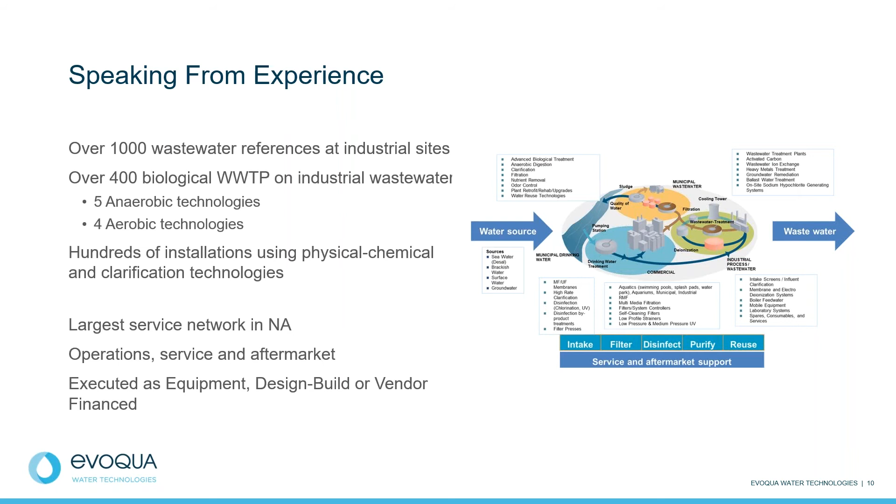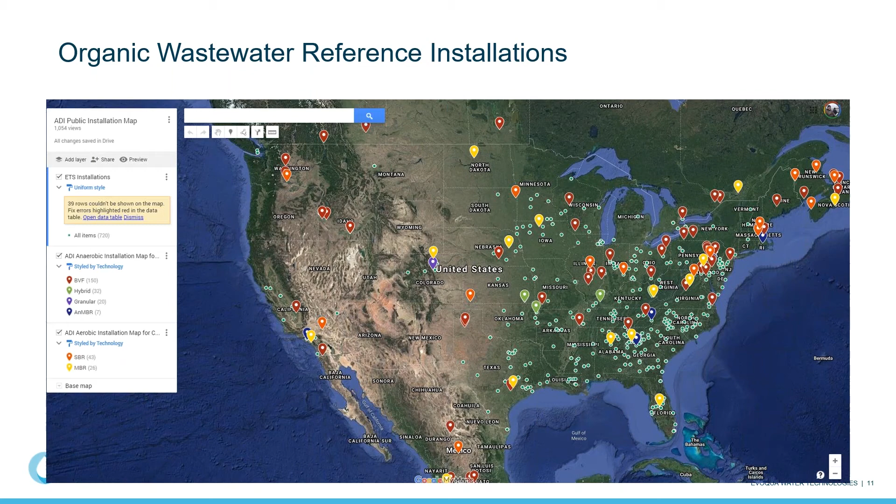Thank you. This is a quick peek at the reference installation map. As you can see, there's typically an Evoqua installation somewhere near you, should you like to go visit one. And with that said, I will hand it over to Jose to do case studies.

Thank you, Barry. Can you hear me okay? Hey, Barry.

So the question I'd like to ask you all, if you're involved in the food and beverage market, is what's in your wastewater? Kind of like that "what's in your wallet" question. What is in your wastewater? So when you're talking about the food and beverage industry, each plant will be unique, of course, but there are some common elements to all food and beverage processing plants.

So your wastewater will look a lot like your final product. So if you're making soup and putting that soup in a can, your wastewater will look similar to what that soup is, plus a lot of water. So wasted product, lost product, and then cleanings from your CIP lines and things like that.

If you look at it in a different way, your wastewater will look a lot like what the kitchen sink drain would look like if you were to make this product in your kitchen sink, or in your garage if you're brewing, if you're making beer.

So I thought I would come up with 4 examples that I wanted to discuss, look at the common elements and also at the differences. So I've picked some of my favorite things. So beer, French fries, candy bar, and yogurt. If I can get into the first one, Barry, please.

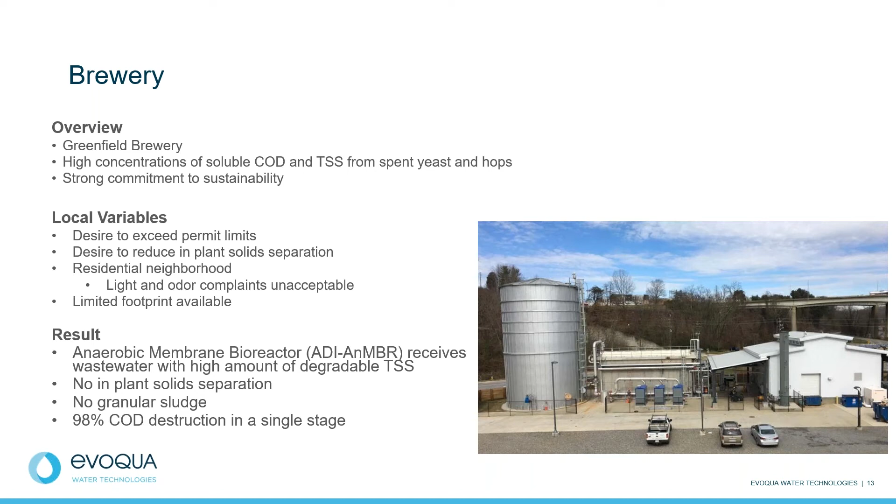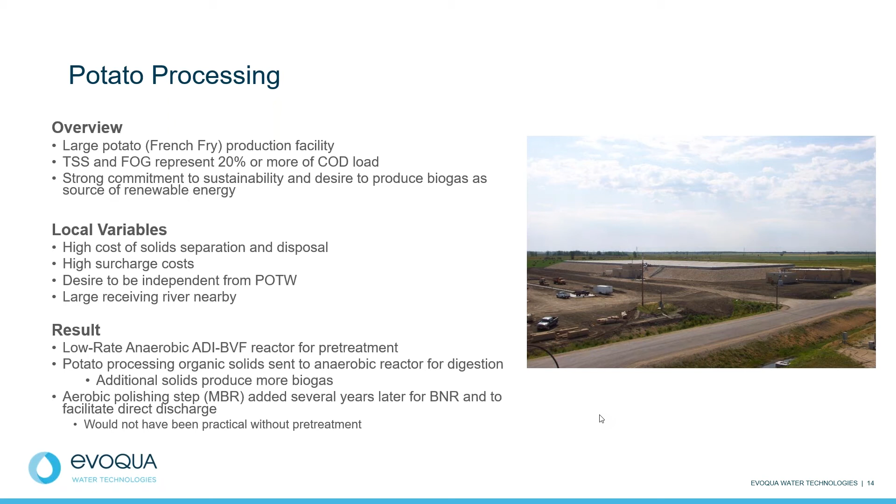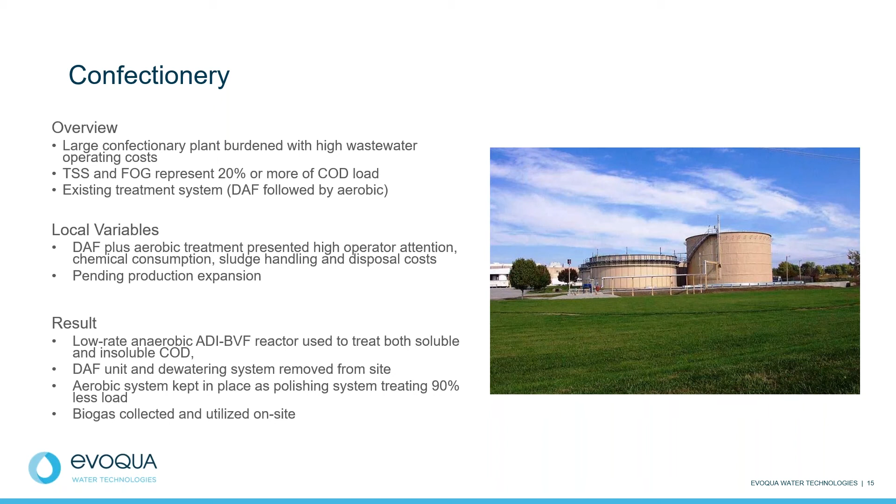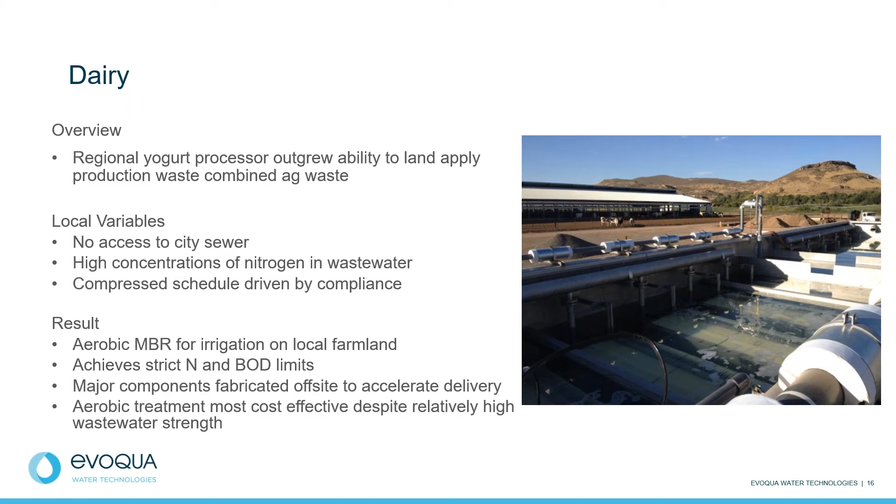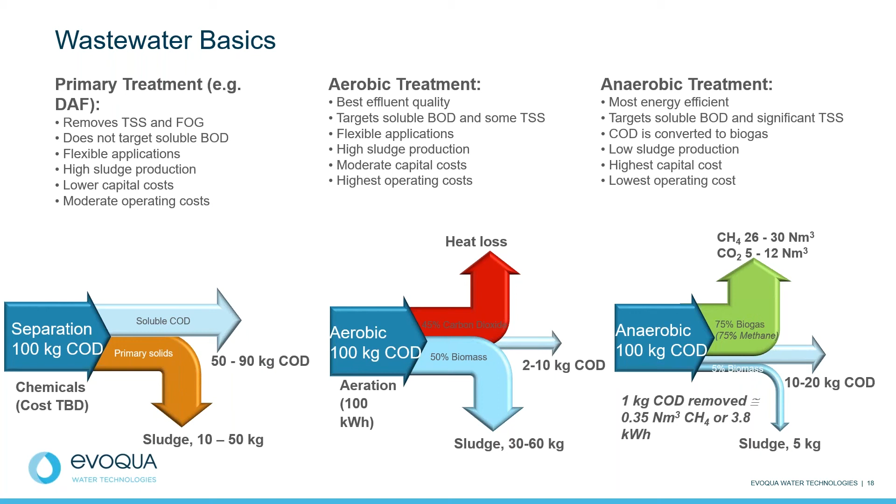One small drawback, if you compare it to aerobic treatment, is the fact that the quality of that effluent that comes out of an anaerobic treatment system, generally speaking, will not be as clean as what comes out of an aerobic treatment system. What we often do then is combine that anaerobic treatment unit to the aerobic treatment unit downstream so that we can polish it off.

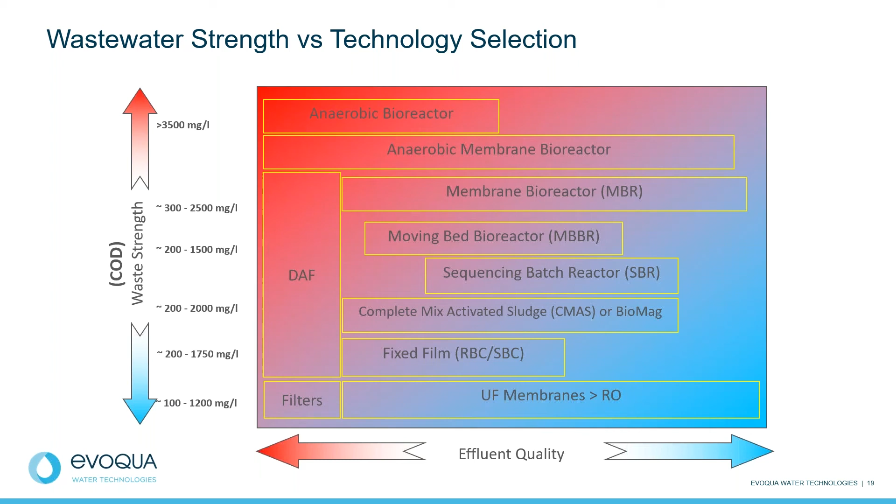Where does the DAF sit in that? Anytime you have particulate or oil and grease in your wastewater, the stronger the better, again, because you get advantages in terms of flows, but you have to be mindful of the fact that the quality of the wastewater that comes out of a DAF may not meet all of your treatment objectives, but it's a good step. It can be a part of your solution.

Okay, so the 4 examples that we showed earlier, the brewery, French fries, candy bar, and yogurt, even though the end product is quite different for each of those cases, the wastewaters that come out of those plants in a lot of ways are quite similar in terms of strength. For example, most of these examples that we're looking at, the COD of the raw wastewater in those plants can be on the order of 6,000 to 10,000 milligrams per liter. That's quite typical for most food and beverage processing plants.

BOD will be a little bit more than half of the COD. And depending on what you're making in your plant, you can be looking at relatively high TSS, high FOG, high nitrogen and phosphorus. Again, that has to do with the ingredients, the products that are coming into your plant for you to make your food or beverage product. And how you tackle that wastewater, like we were saying earlier, will depend on the characteristics of the wastewater, on your objectives for final effluent, and on your local variables that will push you one way or the other.

Can you go back please just for a second, Barry?

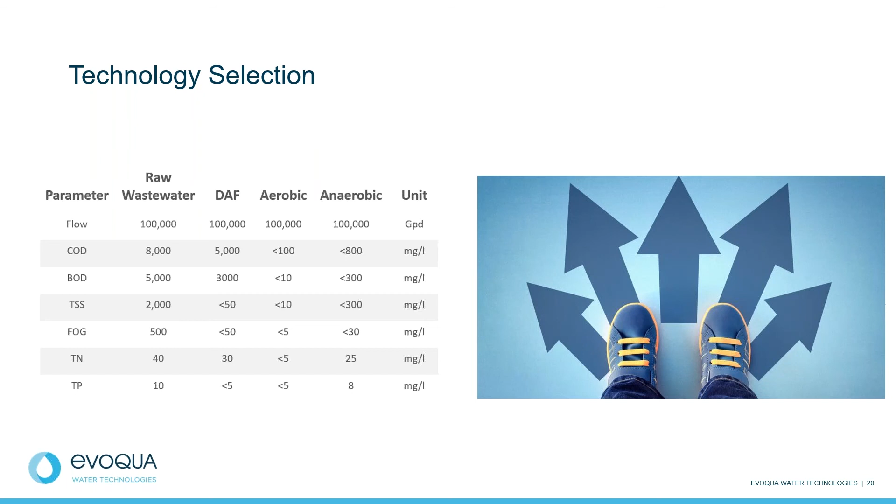So if you're in a site in a city that only is looking for you to remove the suspended solids and the FOG because those two might give the city problems in the sewer line, then a DAF is a nice, elegant solution, and then you're able to continue doing your production, which is what you want to concentrate on. But as your objectives change, so will your solution, and you will be looking at either an anaerobic or an aerobic or a combination of those two prior to discharging your wastewater.

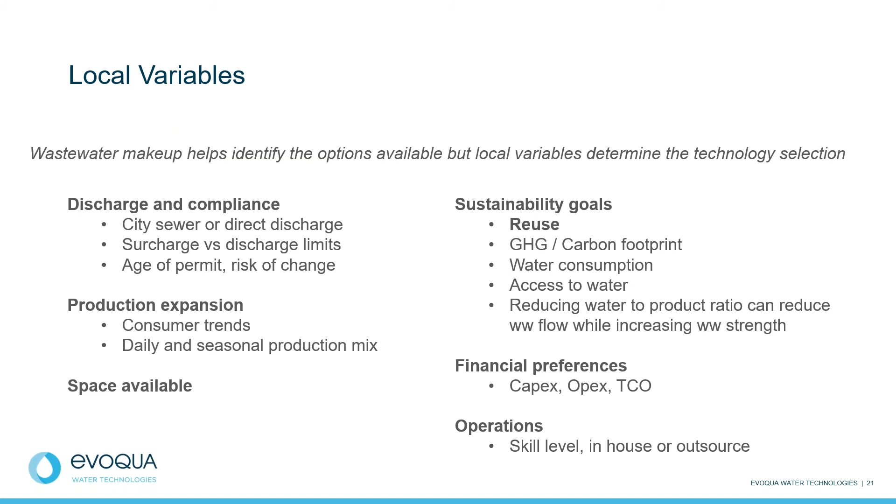And finally, is your company okay with high capex, but looking to make up the difference in the long term by having low operating costs? So we're looking at the total cost of ownership of your treatment system. Like Barry was saying earlier, when you're talking wastewater, you want to think in the long term, because that plant will be there for 10, 20, 30 years, or perhaps beyond. So you want to get it right. And of course, you also want the plant to be relatively simple to operate, because you don't want a whole crew of people having to operate a treatment plant. You want that plant to be as simple as possible.

Okay, Barry, you were doing some summary here. Yeah, sorry, I was on mute.

Thank you, Jose, and repeating, reinforcing what you've said, there is a bit of an order of operations to it. It's not hard and fast, but if you had your choice, you would put in the anaerobic system first, and then you could right size your aerobic system or your polishing system of some sort. You're not designing that polishing system for the full raw wastewater load. You're designing it to treat 10% of the raw load, because your pretreatment system is removing 90% of it. So if you need, let's say, 50% of your flow for reuse, then you only need to size that system for 50% of the flow.

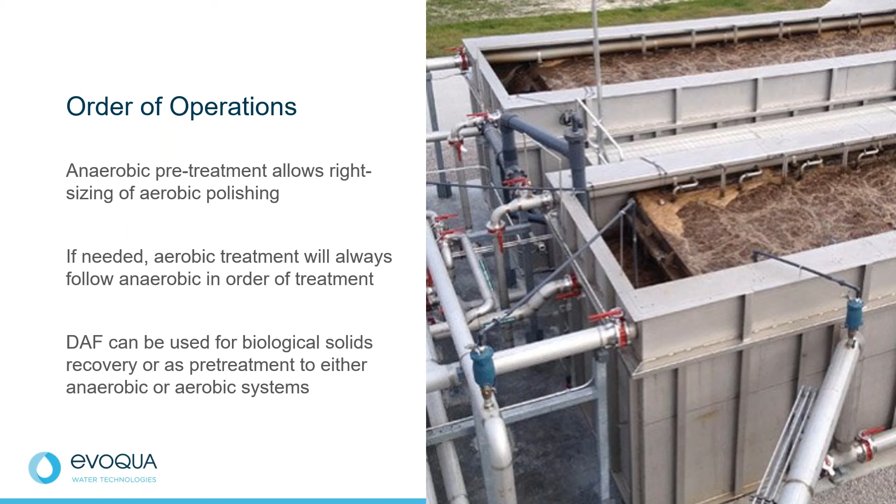The other way around, even if you already have an aerobic treatment system, which many plants do, they maybe start with a DAF, evolve into an aerobic system, and then they've outgrown that. You still need to put the anaerobic treatment system first in terms of the process train. You will never see an anaerobic system following an aerobic system for the reasons we've mentioned. The DAF, of course, is flexible. It can stand alone. It can be used just for solid separation. It can be used as part of an aerobic system for biosolid separation.

Okay, again, a lot of repeat here, so I'm not going to spend a lot of time on these slides. DAF has the lowest capital costs, probably has the highest operating costs. It's targeting the insoluble COD. You're going to use it when you've got a high ratio of TSS to COD. You can use it when you've got a friendly permit and your surcharge isn't that bad.

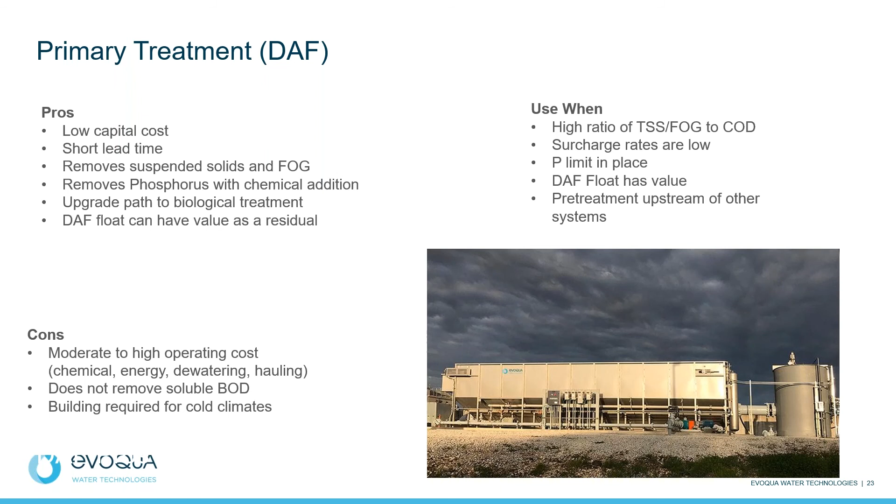You can use it for P removal, and you can use it if you can sell what the DAF separates off. If you can sell animal fat back to a rendering plant, then that may be the thing that makes the most sense. The aerobic side, as Jose mentioned, best effluent quality, highest operating cost. Or sorry, this is the anaerobic one.

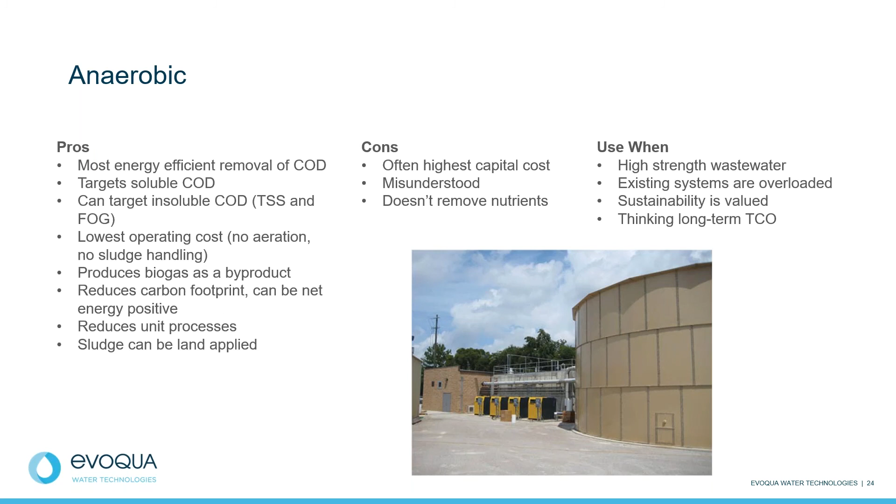Sorry, most efficient removal, lowest operating cost, renewable energy as a byproduct. We use it for high strength wastewater. We use it when we care about sustainability, and we use it when we're thinking long term about the total cost. The aerobic side being the best effluent quality, the highest operating costs.

We're using it when we've got a strict limit to hit. So whether it's a discharge limit or it's an internally imposed limit for reuse, we use aerobic treatment. We use aerobic treatment for nutrient removal. And we use aerobic treatment when there just isn't enough flow or load to warrant any pre-treatment system.

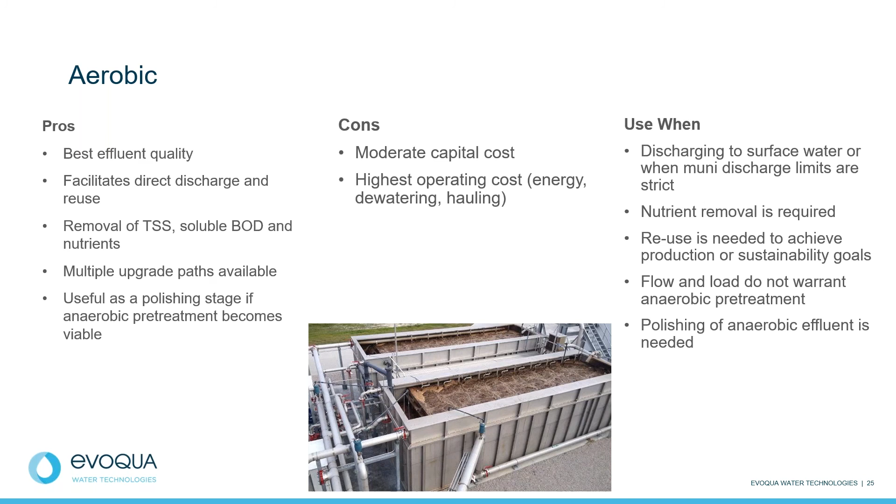So, sometimes, like the dairy example that you saw there, even though the wastewater was strong, it was less than 100,000 gallons a day. The aerobic system was fabricated somewhere off-site and shipped there on a truck, so it was quick, efficient, and high quality. Made sense for them. Beginning the wrap up.

We haven't talked much about what goes on in the plant, but obviously the less stuff that goes down the drain, the smaller your wastewater treatment is going to be. So to the extent that you can eliminate that and do operator training and realize production efficiencies, that's going to have a direct impact on the size of and technology selection you choose for your wastewater treatment plant.

I would also stress that understanding the total cost of ownership is key. You might not want to sign up for something for 20 years that appears to be low cost today, but puts a burden on your business. It's easy to underestimate hauling costs and energy costs and things like that. But those are things that tend to climb and increase over the years and become a burden. What else would I say?

Know your wastewater. Big investments, serious consequences, as we've talked about. Spend the time on characterization. Get the composite sampler in there. Understand what your wastewater looks like on a daily basis, both daily and seasonal variations. And that is small money that pays huge dividends over time.

You want to make sure that whatever you design is representative of your flows, and then also that you've put some thought into what your flows are going to look like in the long term if you're considering your production expansion. Or maybe there's a dietary trend or change out there, and you're going to start producing something else. Well, what's that going to make my wastewater look like in 6 months or 2 or 3 years?

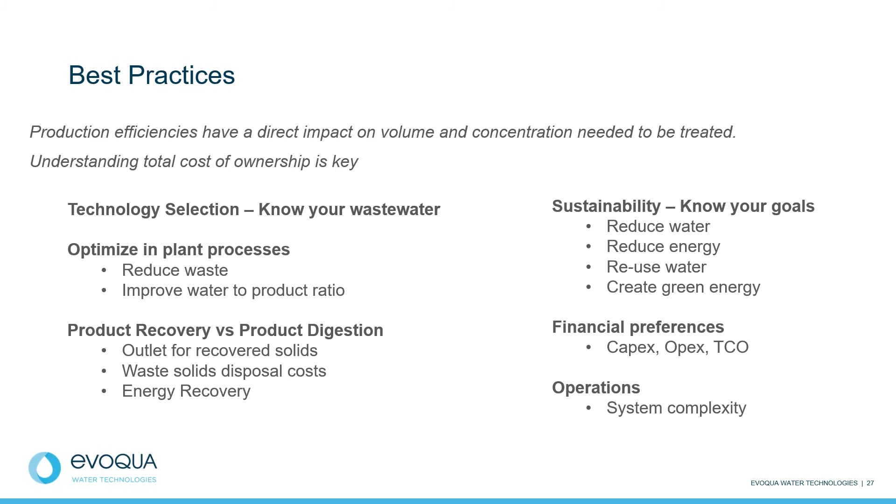Sustainability, of course, like Jose said, yes, we're thinking about future needs now. So if I'm going to have a reuse need or I'm in an area with low availability of water, that's going to play a role in my wastewater treatment evolution plan. We've addressed the rest of these points here.

So in summary, as you guys have heard, this is a game of trade-offs. There are pros and cons to different ways of going about it. And it's not that there's not one right answer, it's that there can be more than one right answer for each plant and each problem. And the more time you spend thinking about what you have and who you want to be, the more clear the path that you should go down will be.

Yes, as I mentioned, investing in your production efficiencies. The best wastewater treatment plant is no wastewater treatment plant, if you can have all of your material go to product. Invest in characterization, as you just mentioned. Think long term, and if possible, seek input from a consultant, I know there's several on the phone here right now, or a vendor that has the ability to help you understand the implications of different choices.

Sometimes you send a basis of design out there and everybody gets the same basis of design, but they can all interpret it differently depending on what capabilities they have in-house. So that's certainly a good way to protect yourself from making a wastewater mistake.